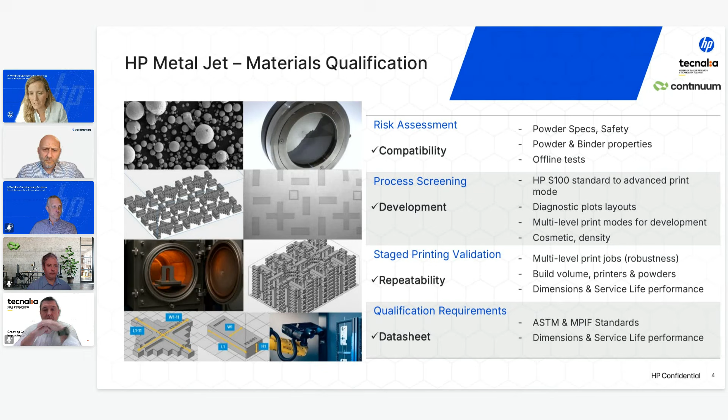But just to finish this introductory description of the qualification, let me explain the secret recipe behind this thorough, deep, and structured methodology to develop material qualification: it's accelerated. We can move fast and in a very smart way, with our quality, robustness, and throughput vectors always as the mission, thanks to the network.

This is thanks to the HP Metal Jet ecosystem network, where we pivot all our developments. I need to say thank you to Continuum and Tecnalia—I think the best team for developing this material now in binder jet—and now to prove it with the results that Inigo is going to show.

Good. Thank you. Let me just very quickly interrupt.

I wanted to give you a quick view of our second survey. It was about the alloys our audience is using for AM, and the top answers are stainless steel and nickel-based superalloys. Titanium is very far behind, which is kind of surprising. We'll talk more about this later.

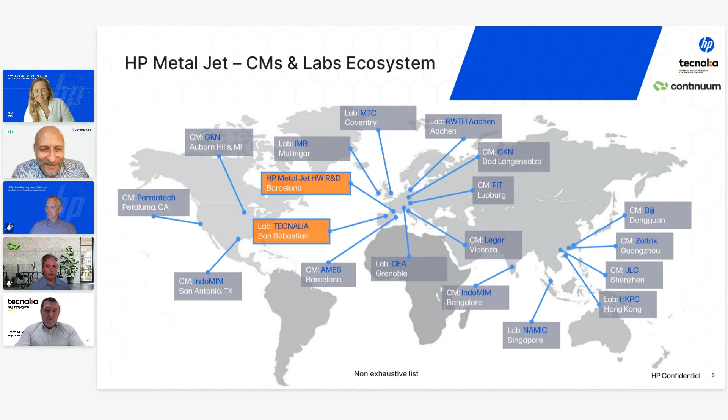Okay, thanks David. So moving forward with the webinar, from Tecnalia. Tecnalia is a private research institute in the north of Spain, and we've been working with Binder Jet already for many years.

In this powder qualification journey, we are contributing with the powder assessment itself. If we want a powder that is adequate for the binder jetting process, we need to bear different aspects in mind. First, we need to make a proper chemistry analysis of the powder, to make sure we have the nominal composition we are supposed to have, to avoid further problems—in this particular powder, the carbon and oxygen levels are very important.

Then we also need to look into the physical properties of the powder, meaning the particle size distribution, and then all the different physical properties of the powder.

We also take a look into the sintering activity of the powder, because we need a good balance between the flowing properties we will evaluate and the sintering activity of the powder—a good combination between how well the powder can be deposited into the printer and its final sintering activity.

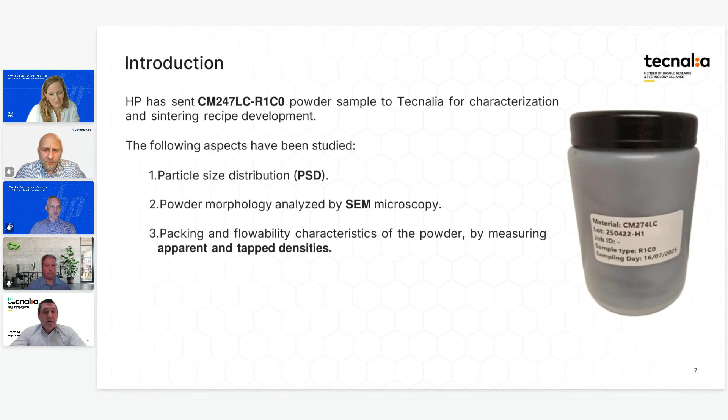We need a good powder with good flow, which normally means spherical particles, nice spheres—we're going to look at them later. We'll also present the packing properties of the powder as well as the flowing properties.

Going to the particle size distribution, the powder we got from Continuum shows a quite monomodal particle size distribution, similar to laser powder bed fusion powders. Comparing it to the typical binder jetting process, we can say we have a slightly coarser particle size compared to what's typically used.

However, due to the liquid phase sintering of this material, as you'll see later, the densities we obtain with this powder are good, although the starting powder particle size is perhaps slightly coarser than typical.

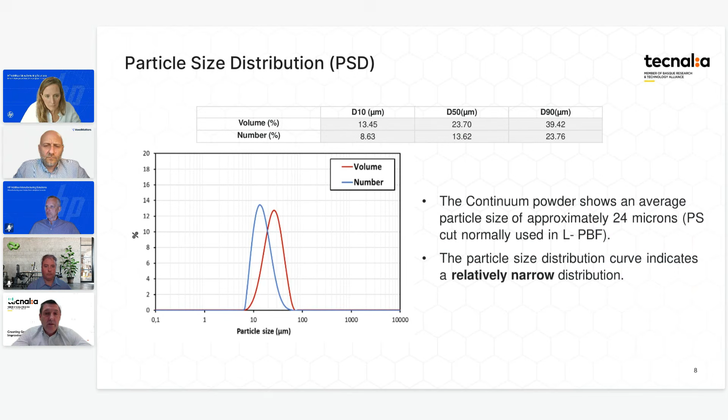We have quite a monomodal distribution with a narrow distribution of powders, with D50 around 23 microns—typical binder jetting powders are below 20-25 microns. So this is slightly coarser, but still good enough for the sintering process, and that has a good impact on the flowing property compared to finer powders. That's a good compromise for the process.

We also evaluated the morphology of the powders using the scanning electron microscope. It's important to have spherical particles, which helps the flowing properties of the powder—we're looking for nice spheres with little satellites, no hollow particles.

Here you can see images taken at different magnifications, showing that the sphericity of the powder is rather high, with still some elongated particles, but very few, and very few satellites as well.

We haven't seen hollow particles either, so that's a good point, and a very nice microstructure of the powder. I think I lost the presentation, David.

I don't know, I touched something that I shouldn't. I knew it was gonna come back up. Sorry, it was me. This is live.

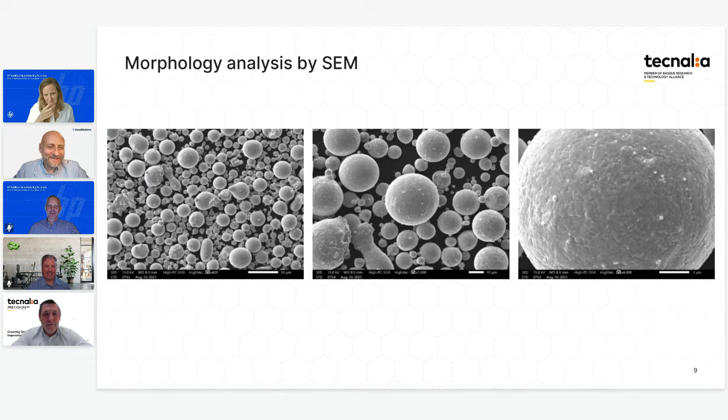Okay, so moving forward a bit, packing and flowing properties of the powder. Here you can see different data for the bulk or apparent density and the tap density. Those two parameters are very important if we want to have a high green density and controlled shrinkage during the sintering process.

Here you can see that we have quite a nice tap density, around 65% of the theoretical density. That is a nice value, quite comparable to other typical binder jetting powders.

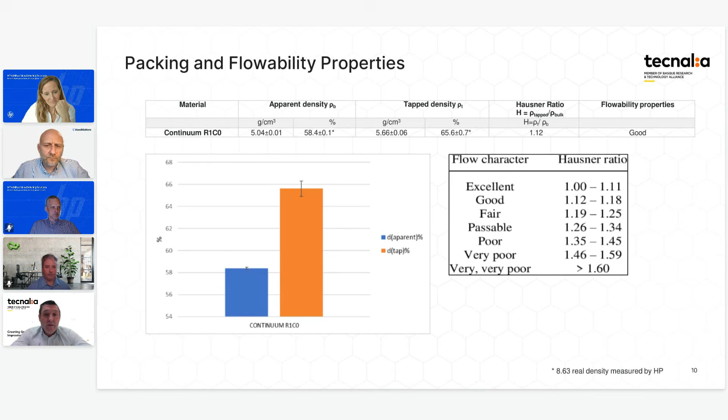And we also calculated here the Hausner ratio, which gives us an idea of the flowing properties, the static flowing properties of the powder, with a value of 1.12, which is ranked in the good area of the flowing properties of the powder. So that is also a nice result for the later sintering and shrinkage of the powder.

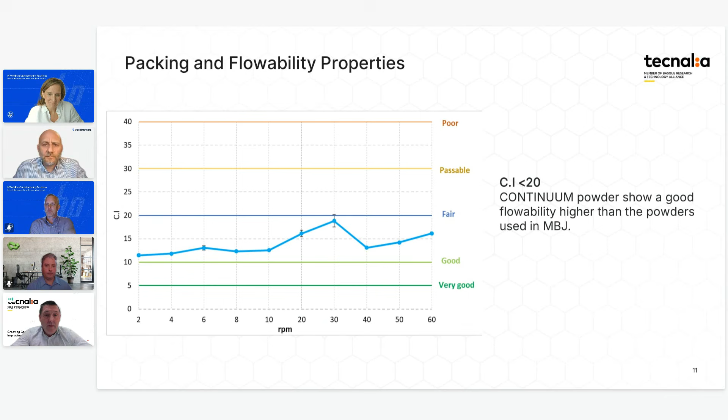And I'm advancing a bit to what Rocío is going to say now, but the sintering properties of the powder are good despite the initial coarser particle size. I think that perhaps you can continue, Rocío.

Thank you, Íñigo, and thank you for the introduction and the characterization of the powders. As I said at the beginning, first stage kind of accomplished. I need to add here, we couldn't put all what we did, but basically we also did the press bars and we confirmed carbon and oxygen as Íñigo was introducing.

And of course, once we got the compatibility check, we went into the next stage of development and screening. As I said, we started with the standard print mode, S100 for stainless steel. And with this powder, we predicted that we were going to have some kind of slight cosmetic issues to start, because this powder was a bit coarser than what we used to work with before.

But we needed that, to have a starting point, and to start prioritizing all of our properties, converging into the full combination of all of them. So with this first standard print mode, we got the green properties okay in terms of green flexural strength, density, but we got a bit of crazing, what we call it, in the bottom side of the parts, we got some kind of sliding of the powder.

So probably this was too dry. And so in the next job, we worked a bit on the recoater parameters and we improved the cosmetic to get it to perfect. So the top and the bottom of the parts were completely okay, very sharp angles, and we confirmed here to reach into the 97% with the green density.

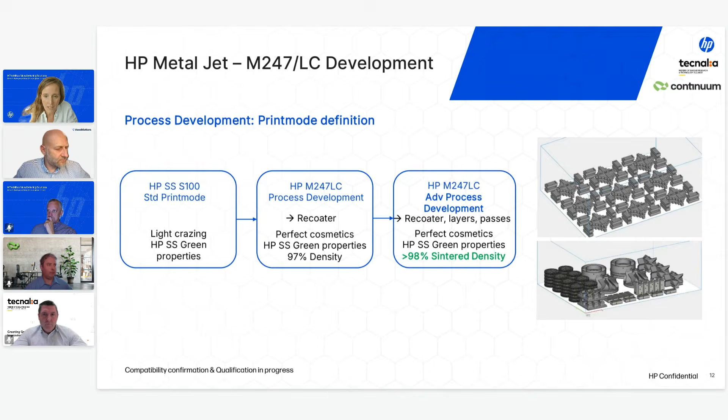So the next slide is basically the convergence of our compatibility confirmation and development confirmation, showing you the whole journey. Basically, it is not that you get everything on the first job, it is the third job that you got it. But getting results of this kind in terms of the second sintering and the third job trial above 98%, we can say it is a good success.

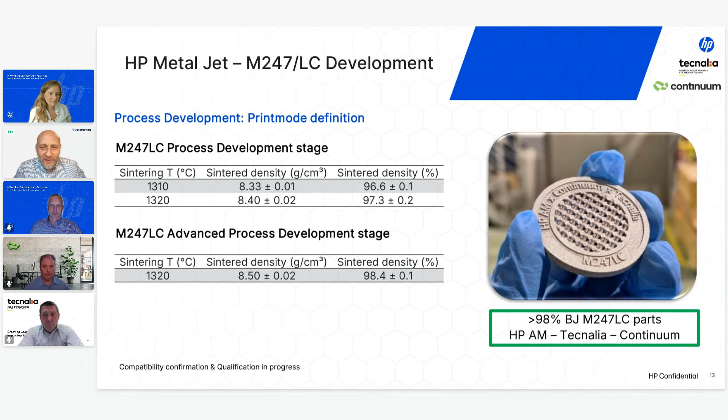So now let me introduce Kevin, who will discuss from Continuum side. He'll tell us about how these partnerships look at the supply chain and production side, and how the continuous production capabilities are enabling these results.

In any case of sustainability, we also have designed this system to be able to go where the powder is needed, but also more importantly, where our reclaim streams that we will tap into for full circular economy are. As we grow and scale, that's also a key point to eliminate carbon reduction, eliminate carbon use or generation. And so we're excited to drive sustainability by also advancing the manufacturing of binder jetting and other systems.

The company's foundations are around sustainability - we do use reclaimed sources, and I think M247 low carbon is a fantastic example of an alloy today that's only casted. But we're driving our production off of reclaimed turbine blades, which may have not found a home to be recycled. And so that is core to the nature of what we do, to ensure a full circular economy.

This has many advantages, of course, both the sustainability impact, but more importantly, a security of supply. And so we do feel it's important, especially that customers do not have to find metal powders that go all the way back to a mining event. It is great that we can actually take alloys today, especially advanced alloys like M247, and put them back to work and make sure those very expensive elements don't have to come out of the earth right now. They can come from usage.

Lastly is really around the quality and the customization of the powder. We are very amenable in our processes to define and work together with, as an example today, HP and Tecnalia, to ensure that the quality of the powder is designed for the unique applications. And I think binder jetting is definitely an area that has some unique properties to it that any powder off the shelf won't work. And that's true for other advanced manufacturing processes.

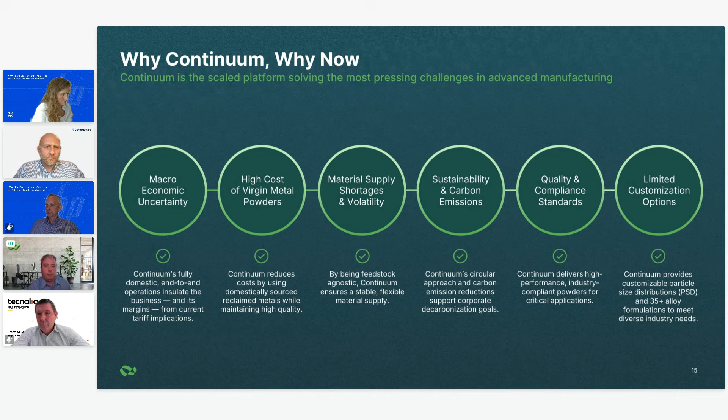So we not only strive to create a solid ecosystem of support with HP and Tecnalia and other types of manufacturers and research institutes, but we are open to really customizing our powders and giving the quality that's truly needed to get these parts manufactured. So it's bringing a holistic approach, and very excited today to be allowed to present our piece in that area and creating that ecosystem.

Where we go next beyond M247 is really a journey of new powders. And so we'd love input today on where to go next and what powders HP and Tecnalia can deliver to other applications. The company has robustly manufactured over 35 different alloys, but for probably many on the phone, you have a realization that there's many more to come, and guidance from this team of members and other people in the industry will be fantastic for us to set out that roadmap and journey of what comes next.

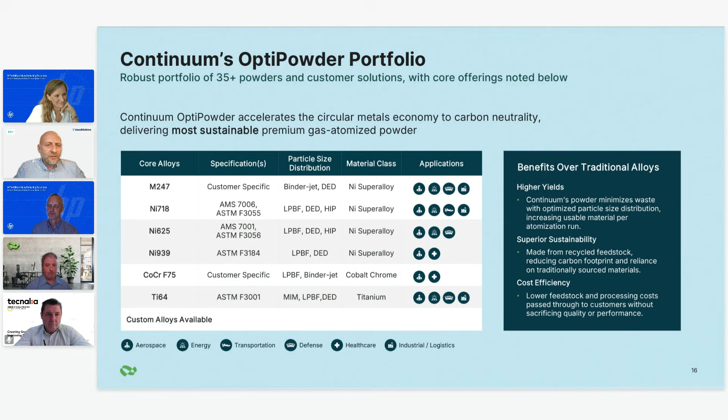Let me go for the first question that came in: as you look ahead, what do you see as the most impactful innovation that would quickly accelerate the qualification and industrial adoption of superalloys over the next 5 years? I think this is a question for everyone, so we can go in order, or if somebody wants to answer first, go ahead.

I mean, I can go ahead and take an initial stab at it. Actually, go ahead, everybody's looking at me, I think. So there you go. Yeah, I was looking at you.

I think probably a couple of different areas in terms of impactful innovation. One thing I'll draw from, based on the poll that was sent out, is in terms of people's familiarity with 247. I was surprised at how many respondents this is their first introduction to 247, and or have very limited use, if any, with it. So I think in terms of the innovation required for adoption or qualification of nickel superalloys with binder jetting, the main innovation needed is getting that knowledge and experience with that material out to the public, being able to do new geometries or new applications with the material that historically, as I mentioned earlier, typically has either been cast or forged.